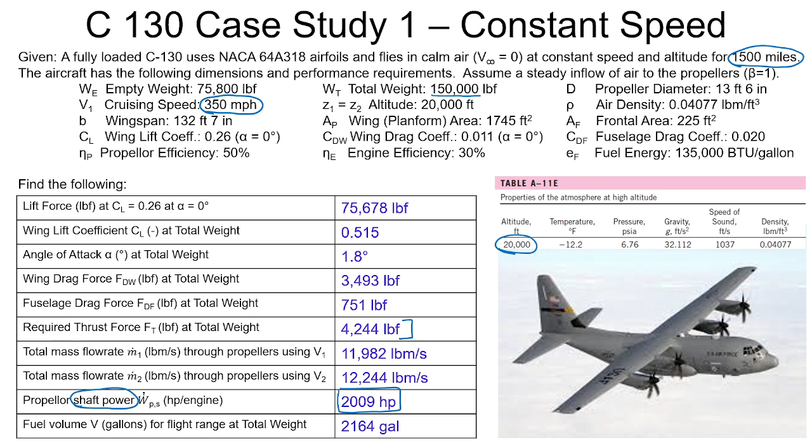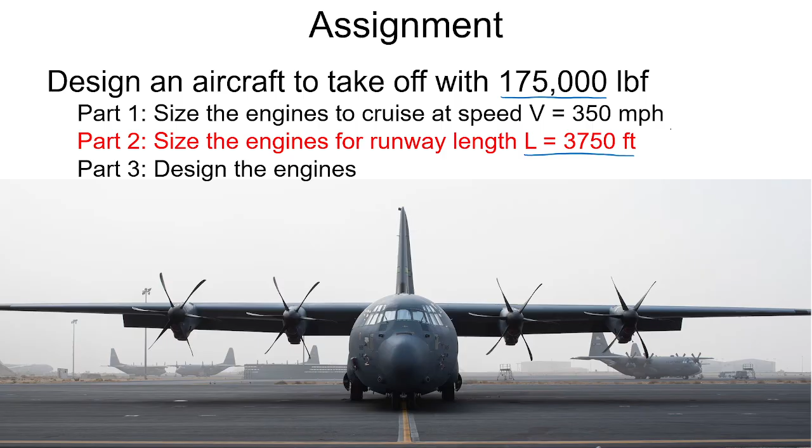We saw that 2,000 horsepower of shaft power were required by each engine to maintain steady flight at constant elevation. Now we're going to up the game and see what engine size would be required for it to take off with 175,000 pound force of total weight, using a runway of length 3,750 feet. This increases the amount of power required by the engines, and we're going to see if that comes in closer agreement with the total shaft horsepower needed.

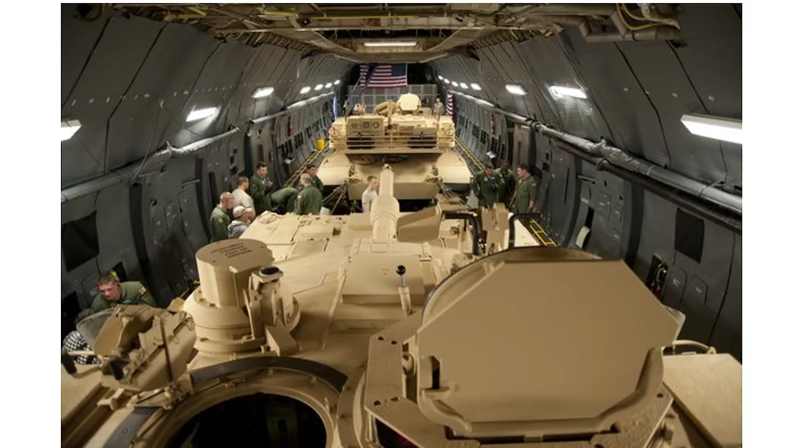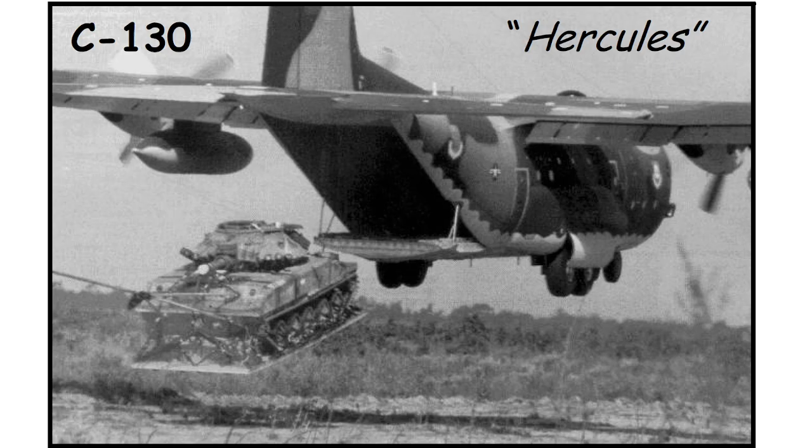You can see these aircraft are intended to carry very heavy vehicles, such as the Army tank being loaded right there. On the interior, there's quite a bit of weight held by that airframe, in addition to personnel and fuel that can bring it up to of the order of 175,000 pounds for dropping off cargo at whatever location may be needed. So the extremes of carrying load for this aircraft are 175,000 pounds for wartime conditions.

Now let's do a quick look again at the typical dimensions of the aircraft. We've got 133 feet of wingspan, about 100 feet of length, about 40 feet of height, and a planform area of 1,745 feet. We'll disregard the empty weight, the useful load, and the takeoff weight, which we know is now 175,000 pounds. Let's briefly refresh on the answer we're expecting to see: about 4,600 shaft horsepower for each of the turboprop engines.

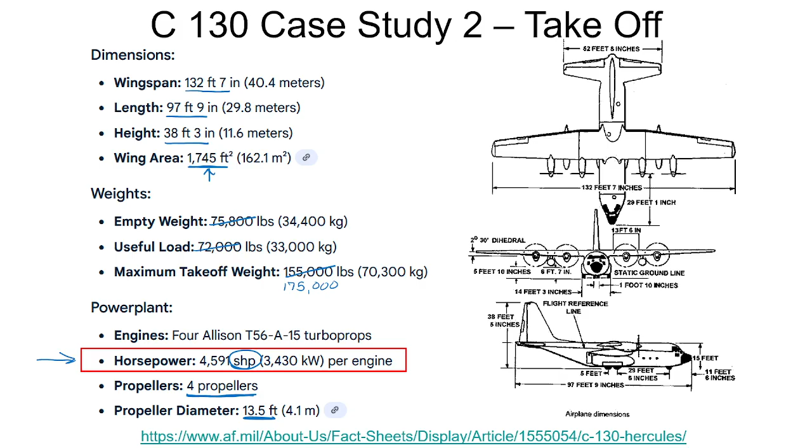These are turbines with propellers attached, having a diameter of 13.5 feet. If we look at our NACA 64A318 airfoils, we can see that at an angle of attack of 6 degrees, the lift coefficient is about 1.07, and the corresponding drag coefficient is about 0.014.

But if we were to find the takeoff speed required for this aircraft, we'd see it would be inordinately high to attain sufficient lift force given this relatively low lift coefficient, which is sufficient for level horizontal flight, as we saw in case study part one.

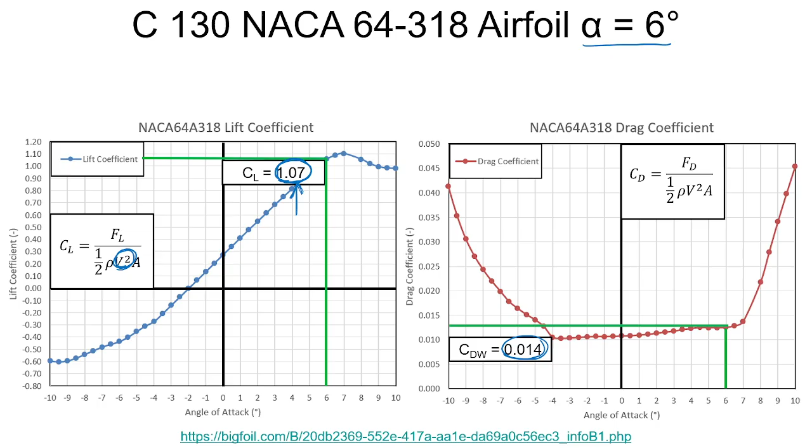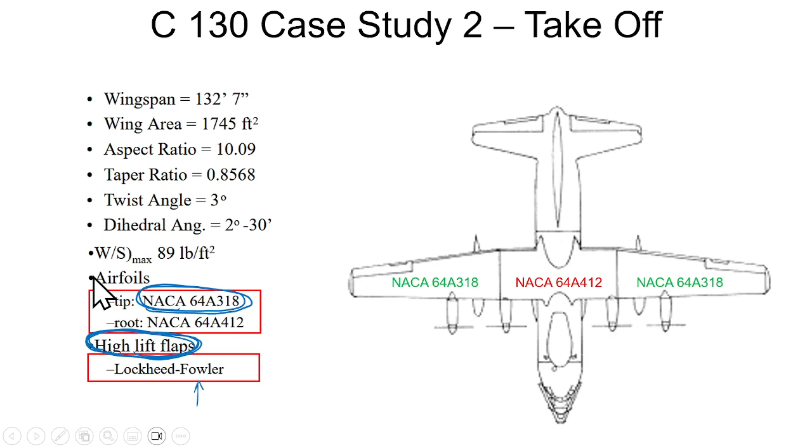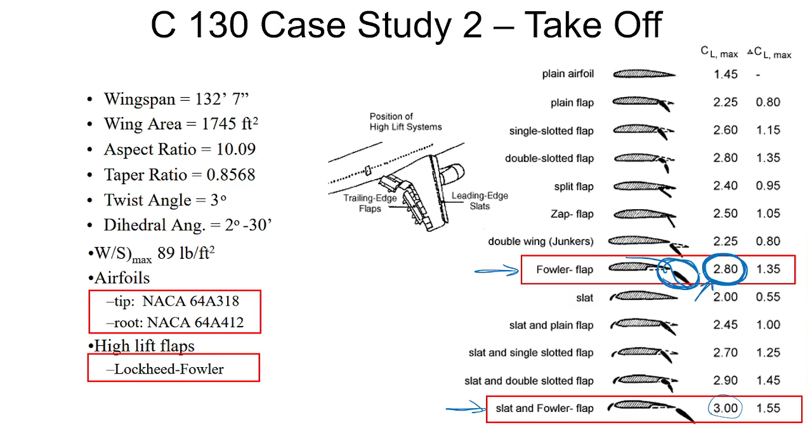So let's look at our new deliverables for case study 2. We're given a fully loaded C-130 aircraft using the NACA 64A318 airfoils, takes off in calm air, that is to say, the wind speed is 0 feet per second or miles per hour in this case, and it's got a runway length of 3,750 feet.

This is a relatively short airfield, and it's kind of typical of some of the extreme conditions these aircraft can be pushed to under wartime conditions. As I mentioned, we're going with 175,000 pound force of total weight in all conditions of these calculations. Propeller diameter is the same.

We've got an air density typical of sea level, so the elevation here we'll just say is around 0, maybe 100 feet or so. We don't know what the takeoff velocity is; in fact, that's one of the deliverables for our calculations here. The wingspan, planform area, and frontal area remain the same as the first instance. We've got our lift coefficient of 2.8, a somewhat higher drag coefficient of 0.03, and our fuselage drag coefficient remains the 0.02 we saw earlier.

The propeller efficiency and engine efficiency remain those conservative values we saw for case study part 1, just to ensure our engines are sized adequately for the extreme condition. Again, we'll be using JP8 fuel with its energy content of 135,000 British thermal units per gallon.

3,750 feet of acceleration, I'll say constant acceleration, from our initial position to liftoff. So let's start with a review of the velocities that we see.

On the one hand, we know that the airframe, or the aircraft, induces a velocity over itself based on the speed of the aircraft. So we start with just a look at how it is that gives rise to the lift force.

The airframe speed and the induced velocity is used to produce the lift force with the lift coefficient of 2.8 that we saw earlier, acting on the planform area of

1745 square feet. So we need to find the velocity of the aircraft at takeoff, which remains unknown for the present time, knowing that the lift force has to be greater than or equal to, we'll say slightly greater than, the total weight of the aircraft, which was the 175,000 pounds that we saw.

Beyond that, we know that we need to use summation of forces in the x and y direction to figure out all parameters of this takeoff condition, and we also need to use the conservation of linear momentum equation, an adaptation of Newton's second law, in order to figure out the thrust force acting on the aircraft.

And we'll go with the simplified representation right here, where we treat our momentum flux correction factors beta as equal to 1 for this steady turbulent flow over the aircraft.

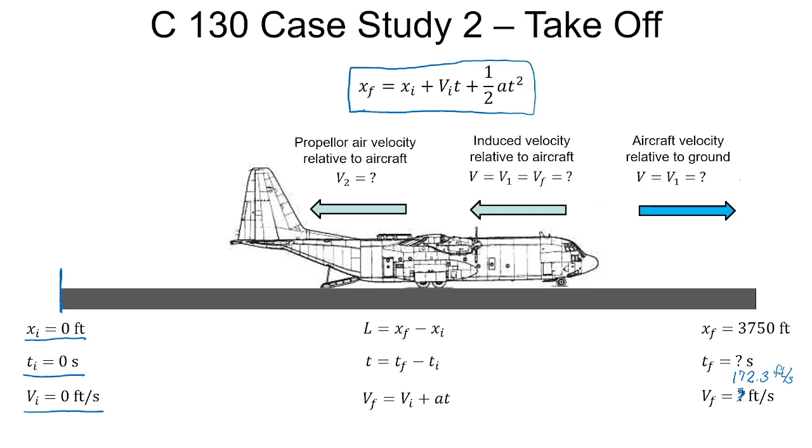Now we know the runway length is 3,750 feet, and we just determined that the velocity required for takeoff is 172.3 feet per second, but now we need to figure out the time required for the acceleration to that velocity, and we also need to find the acceleration itself. So these middle equations right here, we can see x final minus x initial gives us the runway length, and time final minus time initial gives us the actual time to attain the required takeoff velocity under the acceleration of interest to us now, given the initial velocity of 0, and again the initial position of 0 and the initial time of 0.

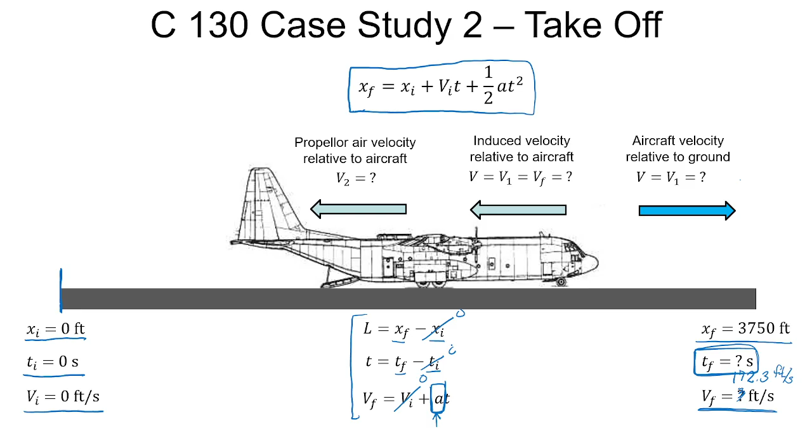We now have enough information to determine acceleration and time. So let's start with our equation for x position. X final is equal to x initial, which we saw as 0, and velocity initial, which we saw as 0 as well. From this, we can figure out the required runway, our required time under a certain acceleration to provide the takeoff velocity that was required. So let's solve this for t squared: t squared is equal to 2 times x final divided by the acceleration of the aircraft.

So this is one equation, two unknowns. That is to say, acceleration and time are unknowns. So now let's jump to this second equation here. Final velocity is a function of initial velocity, acceleration, and takeoff time, where we know initial velocity was equal to 0. So from this equation, we can say time is equal to final velocity divided by acceleration. And then we can say that time squared is equal to velocity final squared divided by acceleration squared.

So just to give a little perspective on these equations, the equation on the left we could say is our x position as a function of time, with t naught and t final, and likewise our x naught and x final. We would expect something of a parabolic displacement given the form of this equation: x final is equal to 1/2 acceleration times time squared. Likewise, for our velocity under constant acceleration, we would have the same t initial and t final, and under this case, we'd also have our v initial set at 0, and then v final.

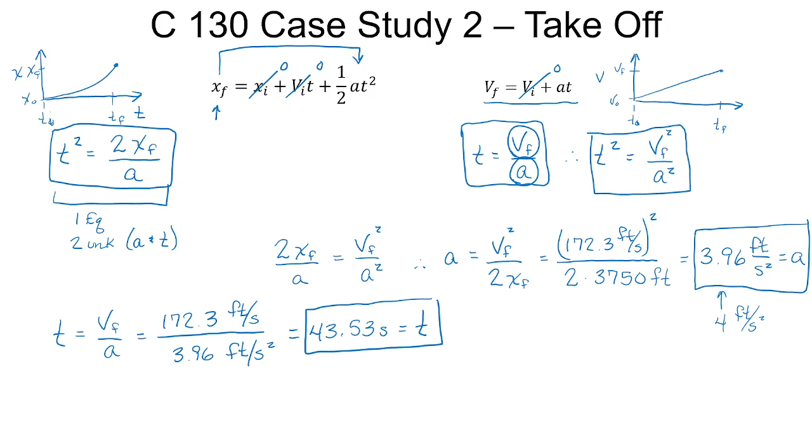Now at this point we can do a check and ascertain that our calculations are correct thus far. We can use this equation and say x final equals 0 feet per second plus 0 feet per second times our time of 43.53 seconds. I know I could have just canceled these out right off the bat, I just want to give you a sense of where it all stands. Times 1/2 times 3.96 times 43.53 seconds squared, and this gives us a distance x final of 3,751.8 feet, which is pretty close to our runway length of 3,750 feet. And so this shows that our calculations are correct.

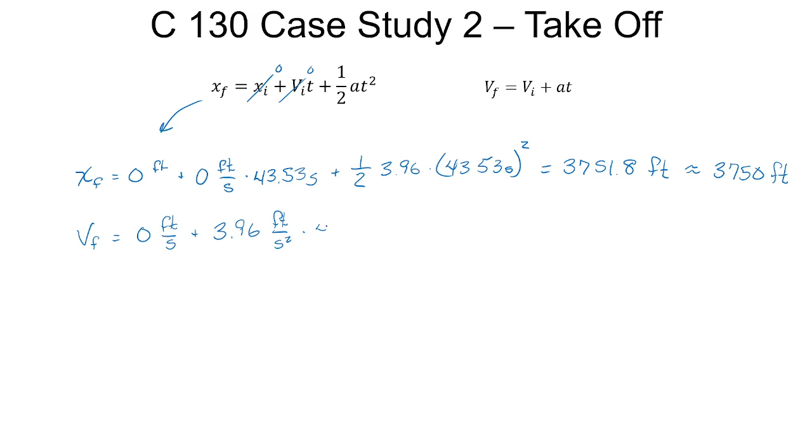Likewise, we can use this second equation. V final equals V initial of 0 feet per second plus our acceleration of 3.96 feet per second squared times our time of 43.53 seconds, gives us a velocity final of 172.3 feet per second, and this is just corroborating what we saw earlier as our number for V1.

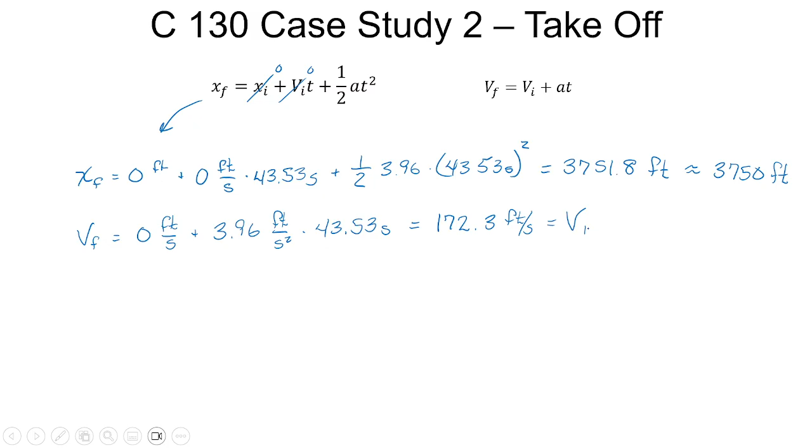So we've answered the first 3 parts of our 10-part exercise case study in the C-130 takeoff power requirements under maximum load conditions. Now let's move forward to our horizontal forces: drag force, fuselage drag force, and required thrust force acting on the wings.

In this case, our acceleration we're going to go with 4 feet per second squared, and our mass is going to be our 175,000 pound mass. From that, we'll determine the thrust force required by our aircraft. We'll use that to get our V2, and we'll also use that to get our mass flow rate through all 4 propellers. But we'll touch down periodically to make sure we're all on the same page.

So let's use our force of drag on the wing calculation: drag coefficient on the wing times the dynamic pressure, 1/2 rho V1 squared, times our planform area. This gives us our drag coefficient of 0.03 times 1/2 times 0.0777 pound mass per cubic foot times our velocity of 172.3 feet per second, quantity squared, times our planform area of 1745 feet squared. This gives us a force of drag acting on the wing of 60,378 pound mass feet per second squared.

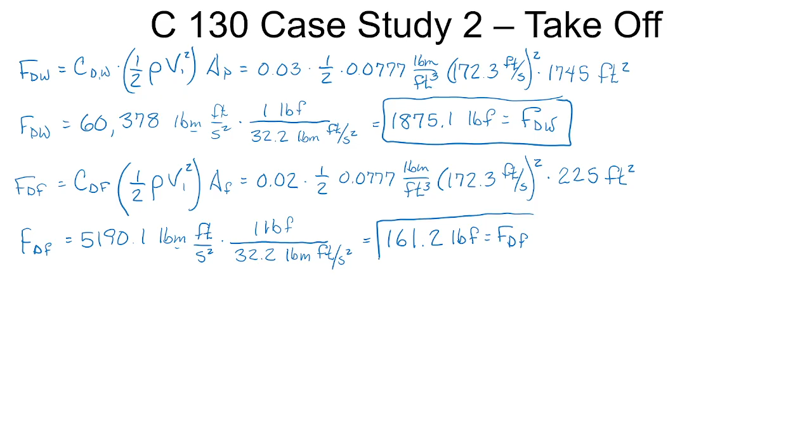We keep note of our pound mass and distinguish those from pound force, recognizing that our values have to come out in units of force, which we obtain by dividing by the unity conversion ratio of 32.2 pound mass feet per second squared for every pound force. This tells us the drag force acting on the fuselage at the moment before takeoff is equal to 161.2 pound force. Put a box around it, the next in our series of answers.

Now we need to do a dynamic analysis where we can draw the aircraft. We know that the wings have a force of drag on the wings, FdW. We know the fuselage has a force of drag on the fuselage. We know that the propellers are providing a force of thrust, and we know that the aircraft itself has a mass of 175,000 pound mass, and it must accelerate at 4 feet per second squared that we saw previously.

So we'll do a summation of forces. In this case, in the x direction, is equal to force of thrust minus force of drag on the wings minus force of drag on the fuselage is equal to our mass times the acceleration.

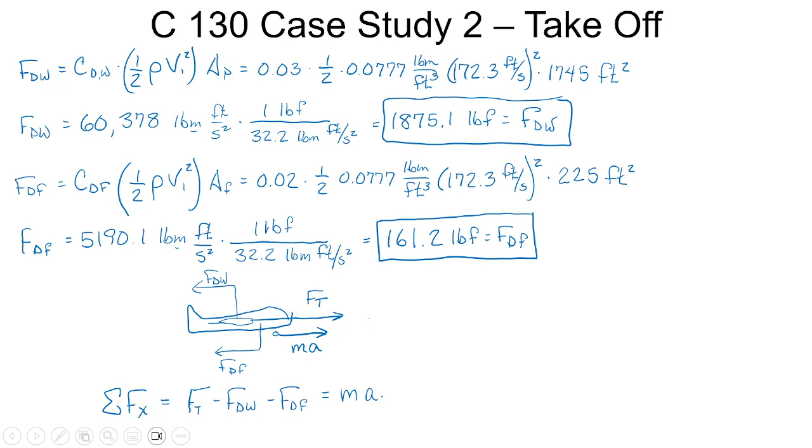So let's carry that forward. This allows us to solve for force of thrust, which is equal to force of drag on the wing plus force of drag on the fuselage plus mass times acceleration, is equal to...

1,875.1 pound force of drag acting on the wings, plus 161.2 pound force of drag acting on the fuselage, plus 175,000 pound mass. Note I'm using the mass of the aircraft, which is numerically identical to the weight force of the aircraft, but here it's given in units of pound mass rather than pound force. And as I said earlier, for acceleration we're just going to round up to 4.0 feet per second squared.

Now this expression, the mass times acceleration, gives us units of pound mass feet per second squared. We have to bring this back to our pound force using the unity conversion ratio of 32.2 pound mass feet per second squared for every 1 pound force.

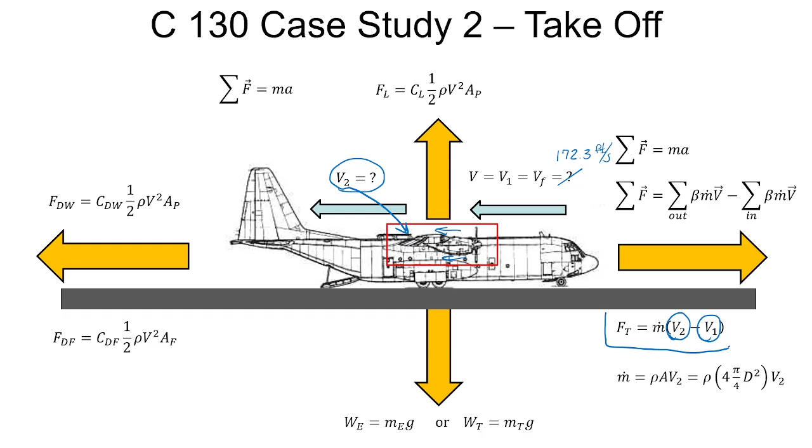So let's return to our diagram. Of all the forces acting on the aircraft, we found our aircraft velocity of 172.3 feet per second, which induces the wind speed on the aircraft at the takeoff condition. Now we're looking for V2, the velocity of air exiting the propeller right here, providing the thrust, the differential of which provides the thrust needed for the aircraft itself.

So let's zoom in. Let's move our control volume from surrounding the entire aircraft to surrounding, we'll just say, looking at a profile of all four engines at once.

So again, these are engines that we'll say are equally dividing the load, but we can look at all four at once and figure out the velocity 2 that we need to provide the thrust and the corresponding mass flow rate. We just saw that we calculated the thrust force required to accelerate this heavily loaded aircraft at 4 feet per second squared. Now we're going to delve into this equation and use that to calculate what we need for V2 to begin with.

So let's take this: force of thrust is equal to mass flow rate, F2, force of thrust is equal to m dot 2 times V2 minus V1, and we saw that m dot 2 is equal to density times area times V2, times V2 minus V1. You may recall we can't use V1 for our mass flow rate, as was exemplified in case study part 1 of this series. So here we've got V2 squared minus V1 V2 is equal to the force of thrust.

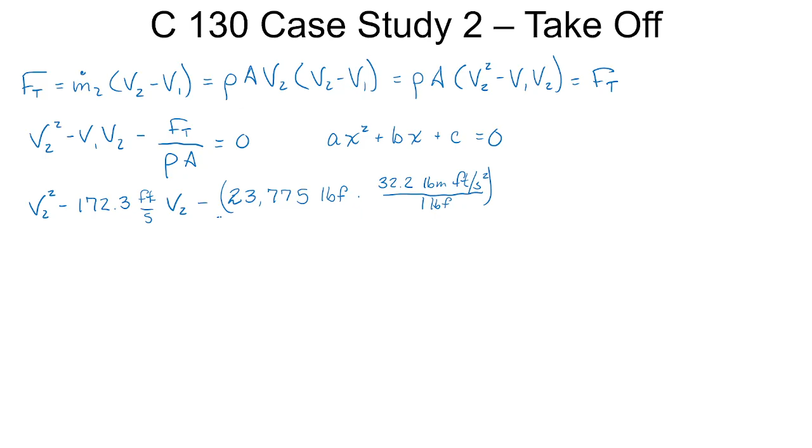Put that right there, divided by our density of 0.0777 pound mass per cubic foot, times our 4 engines, each of which has a swept area of pi over 4 times 13.5 feet squared. This then gives us a more compact representation of V2 squared minus 172.3 feet per second, V2 minus 17,208.6 feet squared per second squared.

And keeping in mind, if we didn't use this unity conversion ratio right here, we would have different units, and we have to have dimensional homogeneity in our equations. That is to say, every term in this expression has to have units of feet squared per second squared, otherwise our answer is junk. So let's say now this is hopefully going to activate. Okay, this is equal to 0.

So now let's solve for V2. We can use the quadratic equation. V2 is equal to 172.3 plus or minus the square root of 172.3 squared minus 4 times a, which happens to be 1 in this case, times negative 17,208.6 feet squared per second squared, all over 2a, which is 2 times 1.

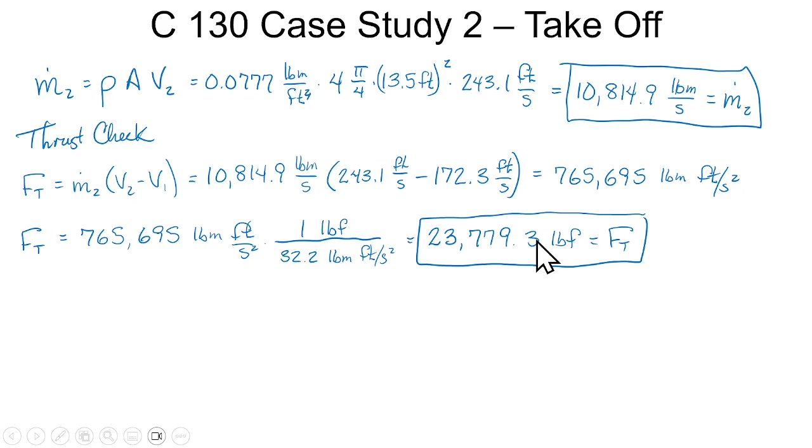So 23,780 is essentially what we're looking for. And when we look back, we just calculated 23,780. Previously, through the summation of forces equals mass times acceleration, we calculated 23,775. So using the momentum equation, we got 23,780 pound force, which is in good agreement with what we see here, just a check of the calculations.

Likewise, we saw the propeller downstream velocity is 243.1 feet per second, and then the total mass flow rate through the propellers is 10,815. So we used this to verify the thrust equation, using Newton's second law to calculate thrust, and we landed in the same spot, getting good consistent results across the board.

Now let's move forward to calculate the total propeller power, propeller fluid power first, required to provide the acceleration of 4 feet per second squared on this aircraft. So we'll start off with just the power form of the general energy equation, this big equation shown right here.

And we also have our mass flow rate, which we just calculated before. Now we want to figure out what terms can remain and what terms can disappear. So while we call this a turboprop engine, it's actually regarded as a pump, or like a compressor or a fan, something that energizes the flow with respect to our reference frame.

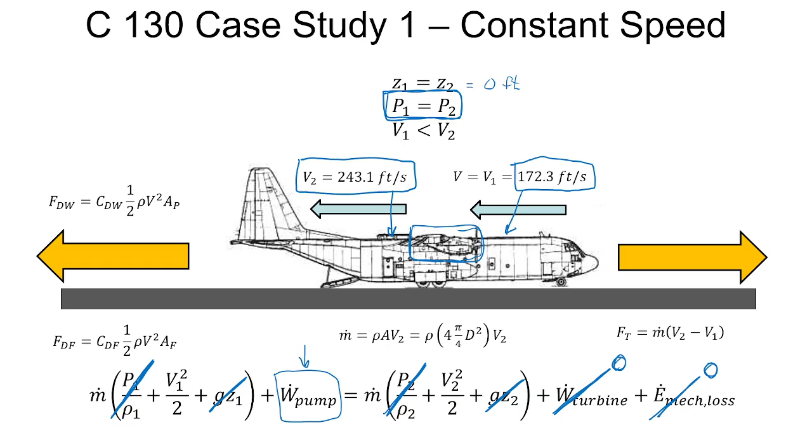So again, looking closer, taking our control volume right here, we have our velocities given. Our pressure term disappears, our gravitational term disappears, gravitation and pressure right there. There's no turbine, no mechanical losses.

So we have an expression for power of the pump, that is to say all four engines, because we're still looking at the aircraft as a whole. Later, we're going to subdivide it and determine the individual shaft power of the engines. But using this information and the power form of the general energy equation, we now have an expression.

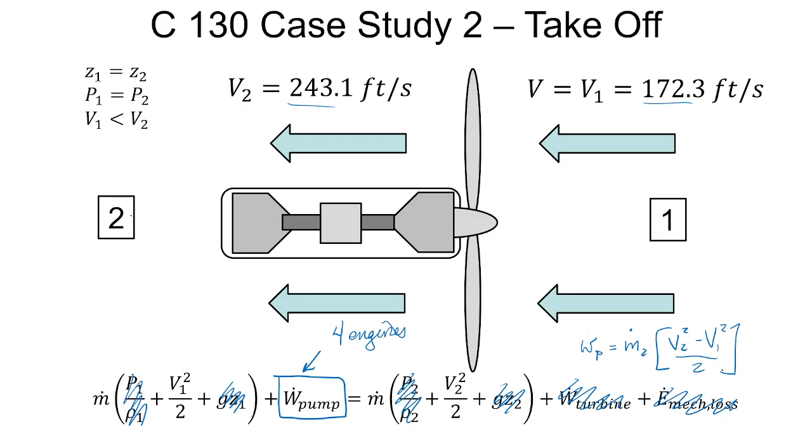In this case, I'll just say this simplifies to W dot of the pump is equal to M dot 2, which we've seen earlier, times V2 squared minus V1 squared over 2, all coming from the power form of the general energy equation. So let's plug in our values here.

So power of all four pumps, that is to say all four engines working as fluid devices, not quite as shaft power yet, is equal to mass flow rate times our downstream velocity, or propeller air velocity, minus our upstream velocity, the induced wind speed on the aircraft as a whole.

And so this allows us to make use of our mass flow rate, M dot 2, 10,814.9 pound mass per second, times our differential kinetic energy on a specific basis, so 243.1 feet per second, quantity squared, minus 172.3 feet per second, quantity squared, divided by 2.

And so this then gives us a power of the engine. I think I should just write it over here. So W dot pumps, all four engines, I should say, is equal to 159,034,835 pound mass feet squared per second cubed.

Now, you may recall from fluid mechanics that these are the dimensions of power, but it's not the units of power that we're looking for. So first we've got to do our unity conversion ratio: 1 pound force divided by 32.2 pound mass feet per second squared. And this then gives us 4,938,970 pound force feet per second.

And so this then gives us 8,979.5 horsepower for all four engines. And so this, put right here, is our power of the pumps. It's not actually the final step of the process.

On the one hand, we can calculate the fluid power per engine, W dot P,E, equal to power of the pumps, all four pumps, divided by N, the number of pumps. So this gives us 8,979 horsepower for all four engines divided by 4 engines, which gives us 2,245 horsepower per engine as the fluid power of the engines.

So this is the fluid power provided by the propeller blades, not the power provided by the shaft to the propeller blades. In this case, shaft power per engine is equal to the power of the pumps themselves per engine divided by the efficiency of the propellers.

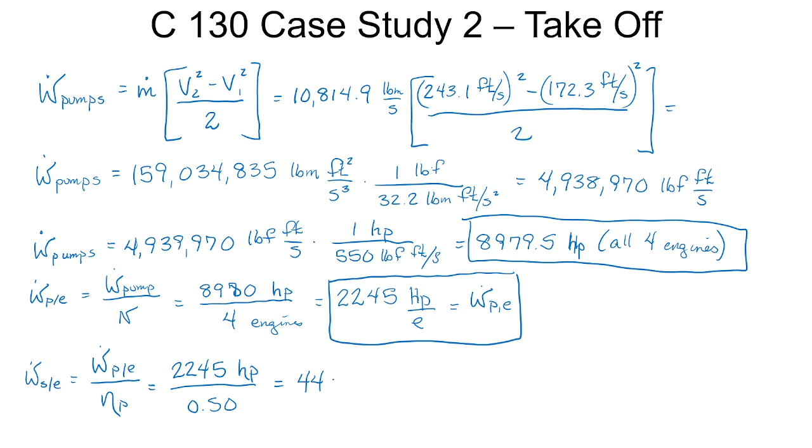And in this case, we've got our 2,245 horsepower divided by our 50% efficiency of those propellers. And so this gives us 4,490 shaft horsepower per engine, equal to W dot S,E.

So this is one of the answers that is actually expected in the boxes. I guess I could get rid of these so I'm not misleading you. This is what we'll list as the power of the engine. This actually comes really close to the nominal value listed in the C-130 information for the power of those engines.

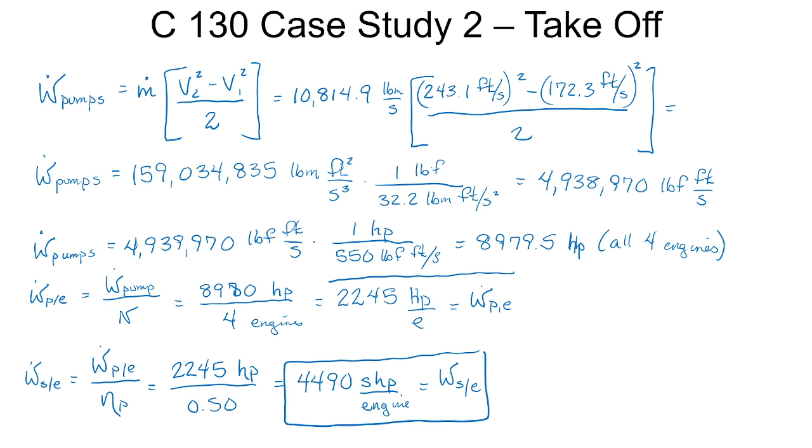Now for our last step, it behooves us to recognize, on one hand we've got our propeller fluid power, then we've got our shaft, and then we've got our turbine, and the turbine is receiving fuel. So we'll say volume flow rate of fuel times energy of the fuel. That's sending chemical energy into the engine.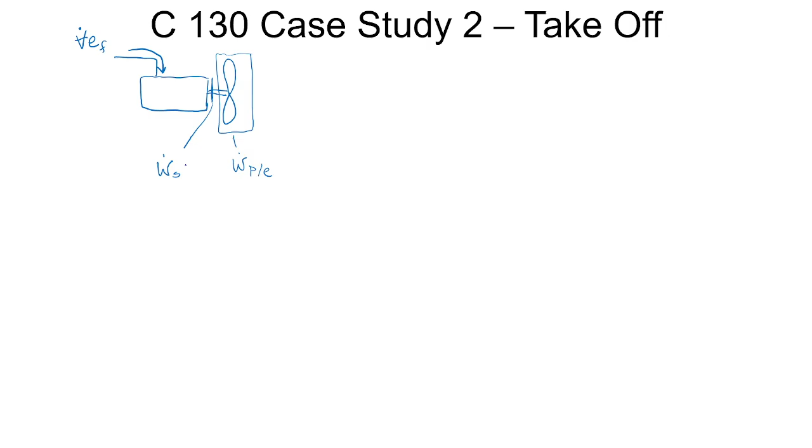So we initially calculated the fluid power provided by the engines themselves, our W dot P,E. Then we divided by the propeller efficiency to get our W dot S,E. And now we're dividing by the engine efficiency of 30% to get...

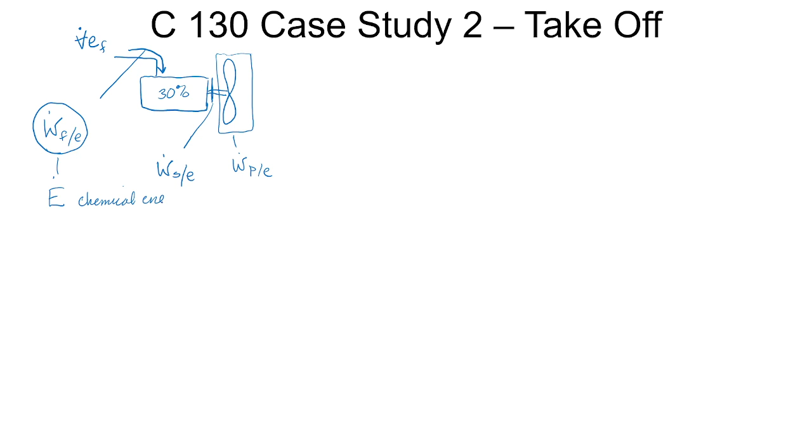I'm going to say it's W fuel,E. This is a little misleading. I should actually use E for chemical energy rather than work, but just so I don't confuse you with terms, we're using the fuel energy drawn from the shaft energy and the engine efficiency. Maybe I'll make this into an E just to clarify it's energy, not work. Our energy flow rate, it's not work rate.

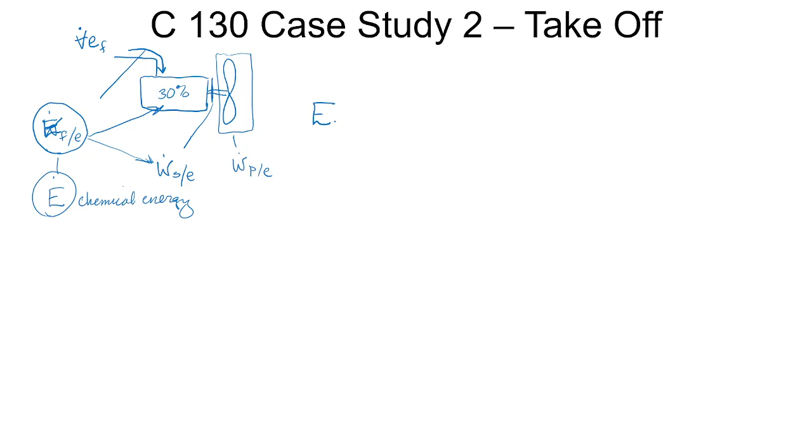So let us use the notation I had previously. We'll say energy flow rate of the fuel per engine is equal to work of the fuel per engine, which is equal to power of the shaft per engine divided by the efficiency of the engine. So this is our 4,490 shaft horsepower divided by our efficiency of 30%.

And this gives us 14,967 horsepower of fuel for our engine. So this represents chemical power contained within the fuel itself, and it's not really convenient to work in terms of chemical power using the terms we have right there.

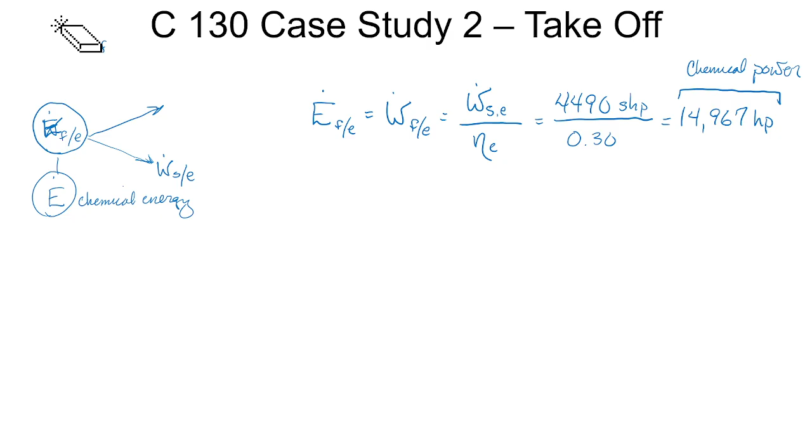So let's convert it into British thermal units per second using some of the many conversions we've seen already. On one hand, we'll take our chemical energy flow rate, which has units of power, equal to 14,967 horsepower. Then let's multiply by our conversion, 0.7068 BTU per second for every 1 horsepower. And so this gives us 10,578 BTUs per second, and this is for every engine.

This is the chemical energy flow rate into the engine in units of British thermal units per second. And then to get the total fuel power going into the engine, we're just going to take the number of engines times the fuel power per engine.

So this is 4 engines times 10,578 BTUs per second per engine. And so this gives us 42,314 BTUs per second of chemical power going into the aircraft, chemical power of the JP-8 fuel.

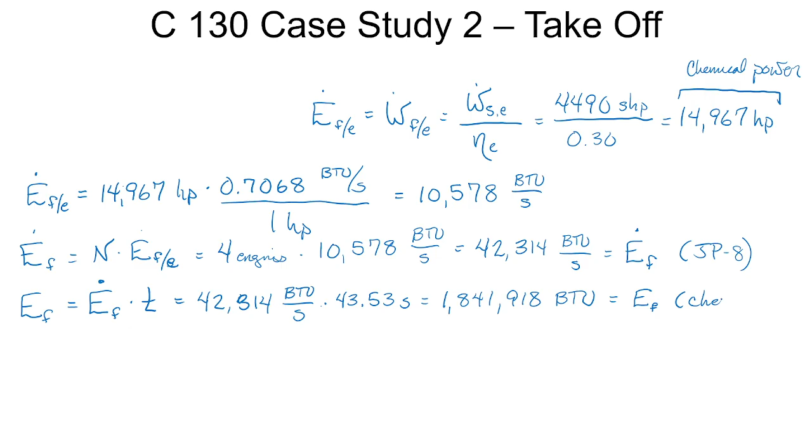So this would just be our little fuel right there. This is just volume in gallons. This was volume flow rate in gallons per second. We don't want to use this equation as we did in case study 1 because we can just use this equation. So this then is our

1,841,918 BTUs divided by our fuel energy content of 135,000 British thermal units per gallon. And this then gives us 13.64 gallons of fuel is the volume needed just for the takeoff. That is to say, for 43.53 seconds of fuel use at an acceleration of 4 feet per second squared.

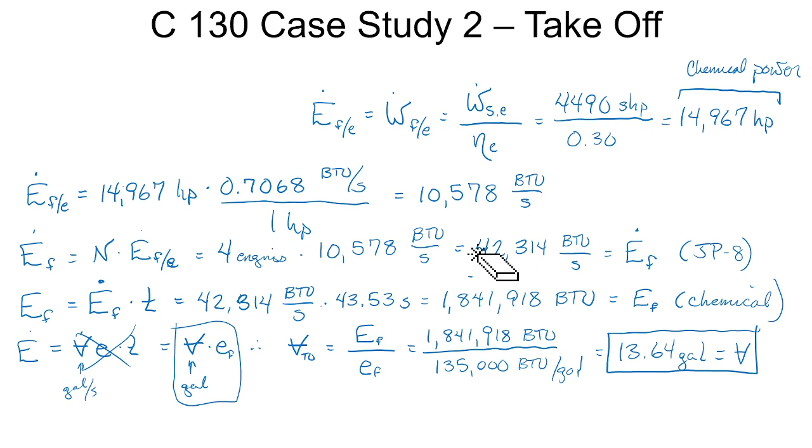So let's carry this forward into our final table here. And we can recall that we worked through sets of calculations. So the first set was get the takeoff velocity needed by the aircraft to provide a lift force that's equal and opposite to the total weight of the aircraft. Provide an acceleration of 3.96 feet per second squared.

For subsequent calculations, we just rounded this up to 4 feet per second squared. We found the takeoff time from an initial velocity of 0 feet per second to an aircraft velocity of 172.3 feet per second was 43.53 seconds. We saw that at 172.3 feet per second, right before takeoff, the wings have a drag force of 1,875 pound force. The fuselage experiences a drag force of 161.2 pound force.

And for these forces to be overcome and produce an acceleration of 4 feet per second, we need 23,775 pound force of thrust to overcome both these drag forces and provide this acceleration.

Using that thrust force, we were able to calculate the velocity of the air downstream of the propellers for each of the 4 engines. From that, we were able to calculate the mass flow rate through each of the 4 engines, through the swept area of each of the 4 propeller blades. And then using these, we were able to double check our results and verify that indeed we get the right thrust force. Then using the power form of the general energy equation, we were able to get the power of all 4 engines acting really by superimposing a control volume across the whole thing.

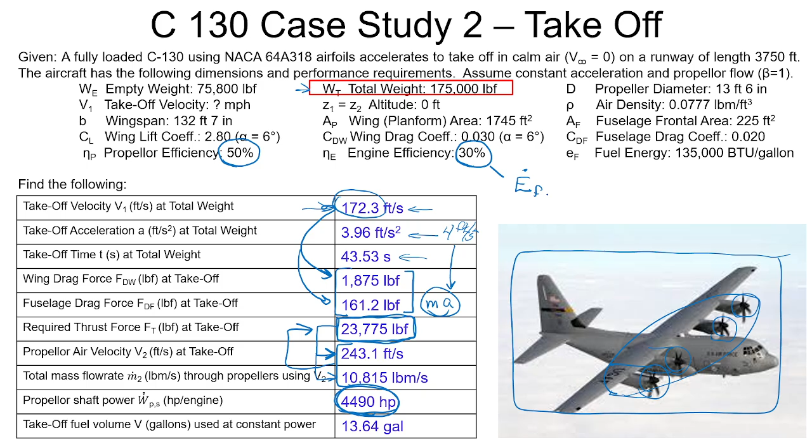And then we divided that by the propeller efficiency to get the total engine horsepower. Then we divided by the number of engines, which was 4, and we got our 4,500 horsepower for each of the 4 engines there. Then we had to further divide that power by the engine efficiency to get the chemical power, which I listed as E dot sub F, chemical power of the fuel going into each of the 4 engines.

We then multiplied those by 4 again to get the total fuel power. So we could say the total fuel power. And then we multiplied by the takeoff time and use that to get the volume and the volume flow rate, this 13.64 gallons of fuel used for takeoff.

So earlier in part 1, we saw that the engines were only around 2,200 horsepower to maintain steady flight at constant elevation, but we realized that that was insufficient for takeoff power. But in this case, we looked at the actual operational conditions of a fully loaded aircraft for wartime conditions, and we were able to conclude that the engines have to be about 4,500 horsepower, that is to say shaft horsepower, to give it a full runway takeoff.